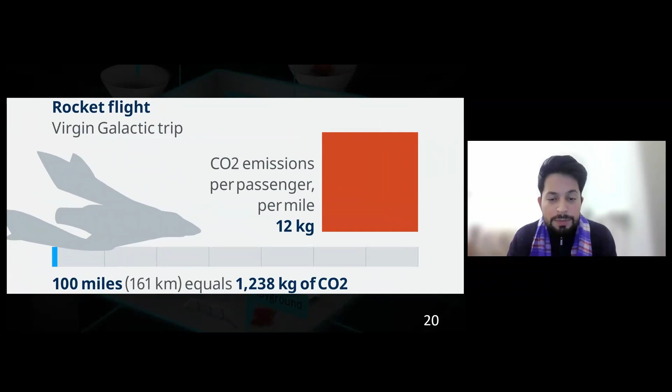So let's look at the first one. If you want to travel 100 miles in a rocket, it will produce more than 1,000 kilograms of CO2. For the same amount of CO2, you can travel close to 7,000 miles in a conventional business class aircraft. So if we compare both, rockets definitely produce more CO2 than conventional aircraft. And this is not good if we think about the long term about our planet and that we want to reduce emissions, CO2 emissions.

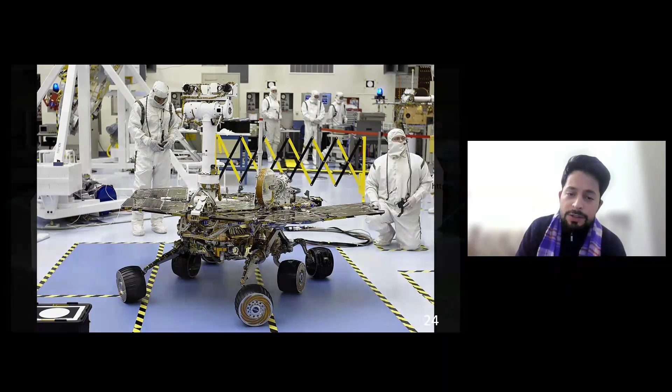The last challenge is that we don't have a full grasp of unknown environments. This is a Mars rover developed in the middle of the 2000s. It was manufactured, produced, and designed by engineers and scientists here on Earth. Scientists made a lot of assumptions about the surface of Mars, and they designed this robot with those assumptions. But as soon as they sent this robot to Mars, after a period of time, the robot got stuck in sand and was not able to move.

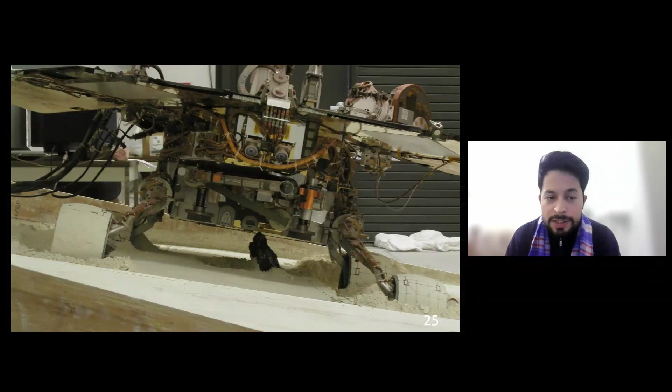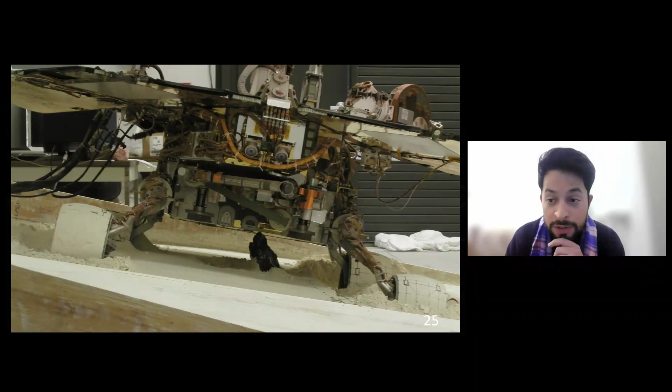So we have three challenges. What can we do about it? Well...

Something we can do: in traditional space exploration, if we want to create a settlement on a different planet, we send an aircraft to, let's say, Mars with people and equipment. These people and equipment start creating facilities for the people. But at some point we need to send that aircraft back because we need to restock provisions, and maybe the people need to rest. This process repeats multiple times until we're happy with the settlement on the different planet. But every time we send this rocket back and forth, we produce CO2, it's expensive, and it's going to take a long time.

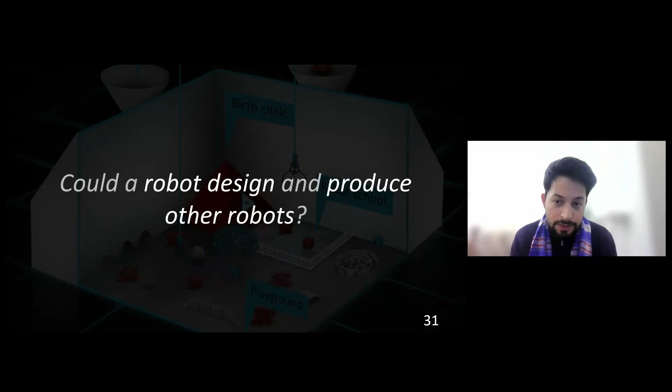A question that we had in this project is: could a robot design and produce other robots? Hopefully by the end of this presentation, we're going to have an answer.

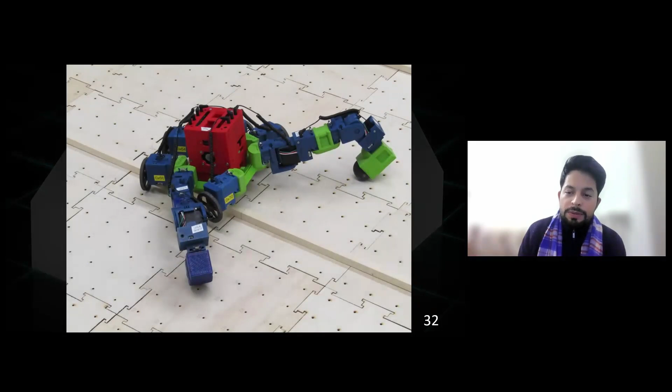The robot I'm going to use as an example for this presentation is this one. Its official name is 56, but for this presentation it's going to be referred to as Bob. We're going to see how Bob was created from the very beginning, how it was autonomously fabricated, and how it's able to perform its mission.

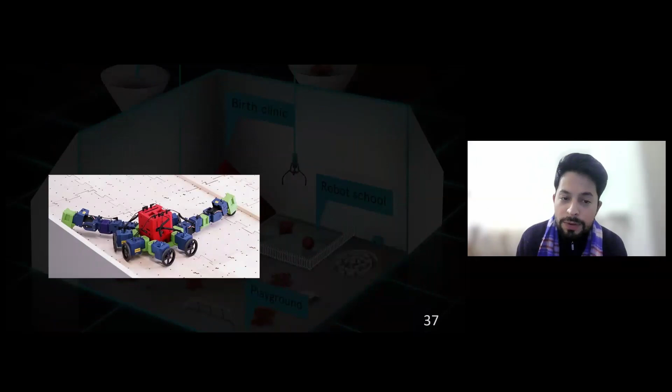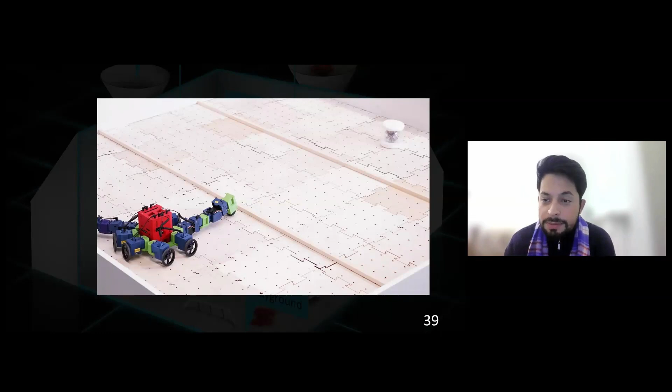But what is the mission that Bob needs to do? Basically, Bob needs to move from one end of an environment and reach a beacon on the other side. But the problem with this environment, what makes it challenging, is there are two sets of ridges in the middle, so a robot with wheels is not able to reach the beacon. It needs more than wheels to reach the beacon—it needs some sort of legs to do it.

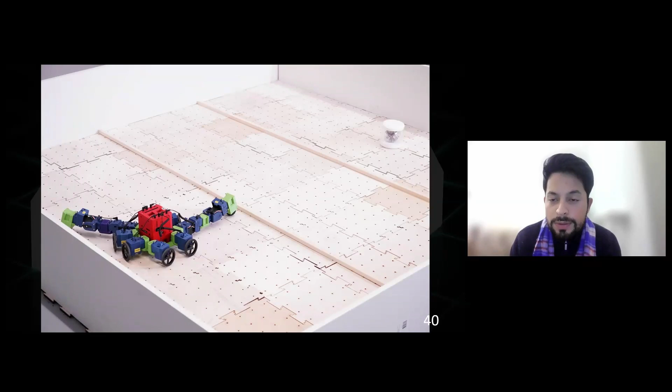We evaluate this robot according to how close it gets to the beacon. This robot went through a process where it was first simulated, then autonomously fabricated, and then we have the final product. I'm going to go through each stage in more detail.

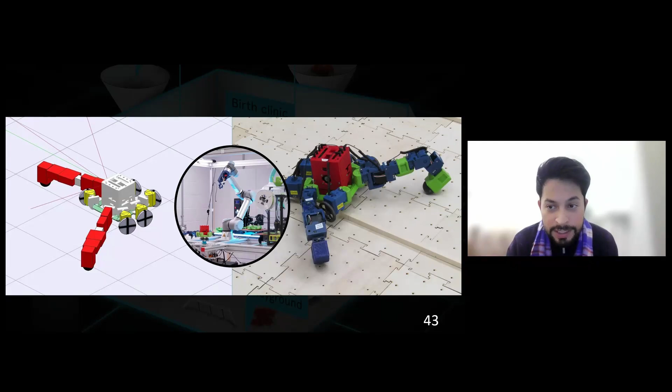In the first stage, the robot is simulated in a computer because there are many advantages to this. It's very quick to simulate a robot, it's very cheap because we don't have to manufacture it, and it's fast to do.

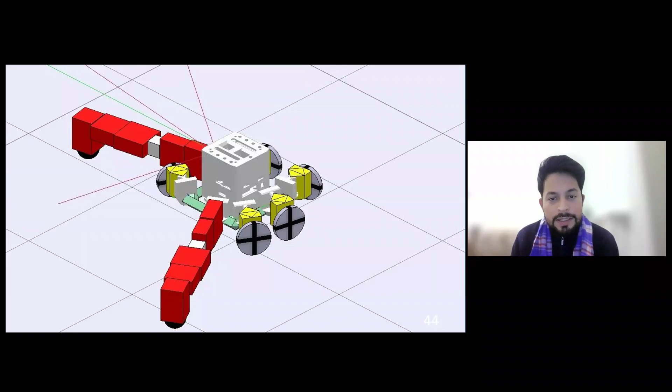In order to design this robot, we use an AI that takes inspiration from nature, not from this specific nature, but from natural selection. I'm going to give you a bit of explanation on how the AI designed these robots and how it takes inspiration from natural selection.

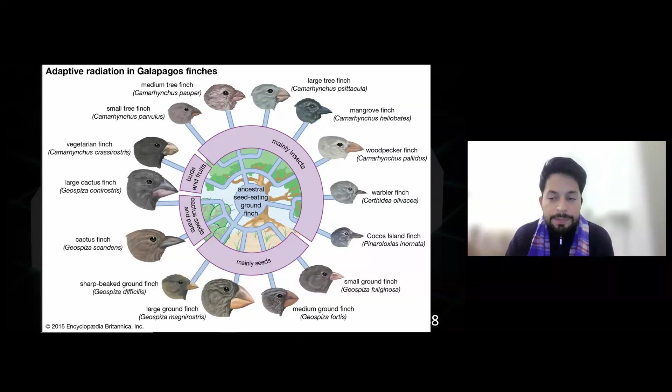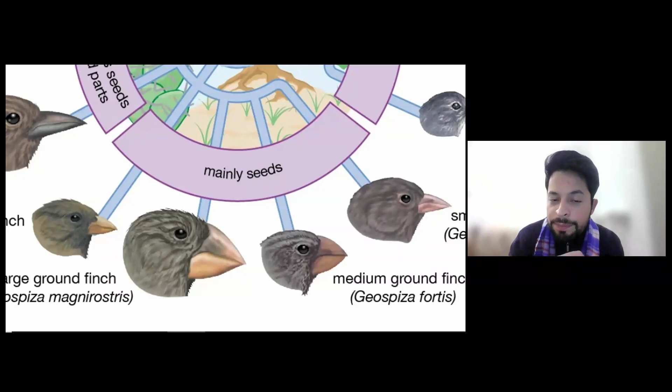In the 1800s, Charles Darwin went to the Galapagos Islands and found something amazing. He found that a group of birds of the same family and species had big, chunky beaks, and these birds used these chunky beaks to eat seeds, breaking through the shell to eat what's inside.

But he found there was another group of birds with smaller beaks, which they used to go through the gaps of trees to get insects hidden inside. So basically, each bird adapted to their own environment—in this case, to the food they needed to eat. If they wanted to eat seeds, they needed bigger beaks; if they wanted to eat bugs, they needed smaller beaks. Natural selection found a way for these birds to survive.

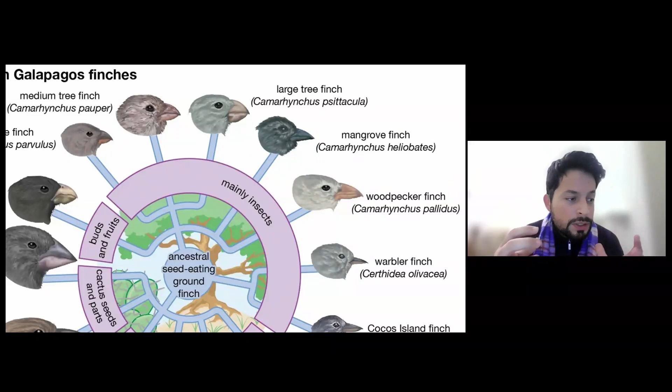So we want something similar in robotics. We want the robots to survive their environments so they can adapt and perform well.

The best robot got a 10, the second best got a 9, and so forth, and the worst one got a 1.

We repeat this process again: we evaluate the 10 robots and score them by how close they got to the beacon, ranking them—you did very well, you get a 10; you didn't do so good, you got a 1. We select the 2 best ones, combine their genes, and generate a new population. Slowly over time, we produce better and better robots this way. This is what the AI is doing, in a nutshell.

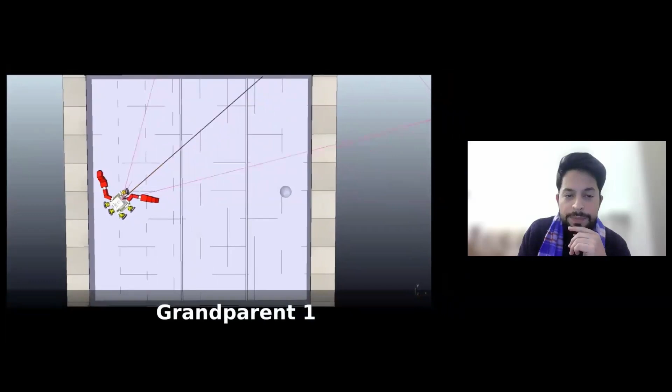Now I'm going to show you how it looks in simulation. The first layer here is the grandparents, and you can see they weren't very efficient at reaching the beacon on the right-hand side. But slowly over time, as the parents and children are born, they come with new characteristics that make them better at solving the environment.

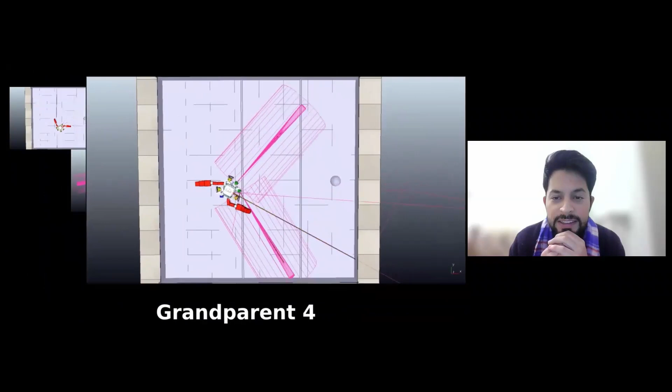For example, you start to see these 2 parents have similar characteristics to Bob, and Bob is a child, by the way—Bob, if you remember the robot from early on in this presentation. Now Bob has the body that can solve this task, but maybe it doesn't have the brain to solve it, so we need to do something about that.

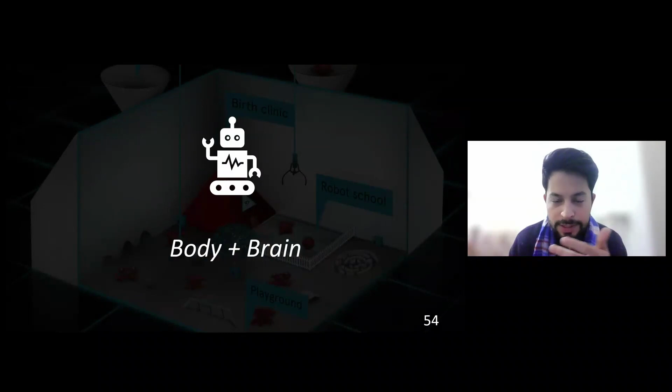A robot, like I was saying, is a body and a brain. We have the body, but what about the brain? The robot needs to learn to do this task, and now Bob needs to go through a learning process where it learns to perform this task.

So we have the body, we have the brain in simulation. Now what we need to do is translate it. Here's a video in more detail showing the process of the robot reaching the target.

And here we go. So yes, we have the robot in simulation. The next step that we need to do is to...

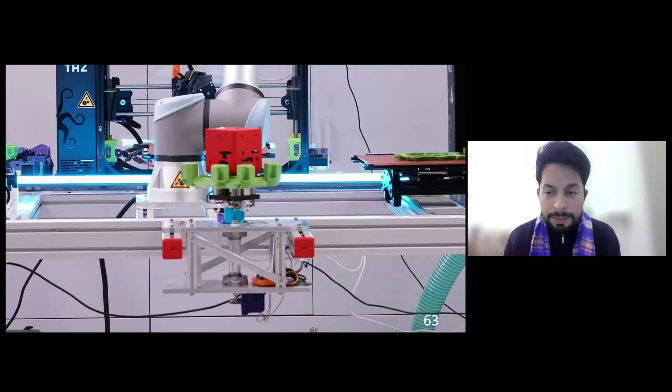Here in the middle is something we call the assembly fixture. What it does is hold the robot tight. There are 4 electromagnets that hold the robot, and this rotates, so it grants access to the robot arm from different directions, so it can attach the different components.

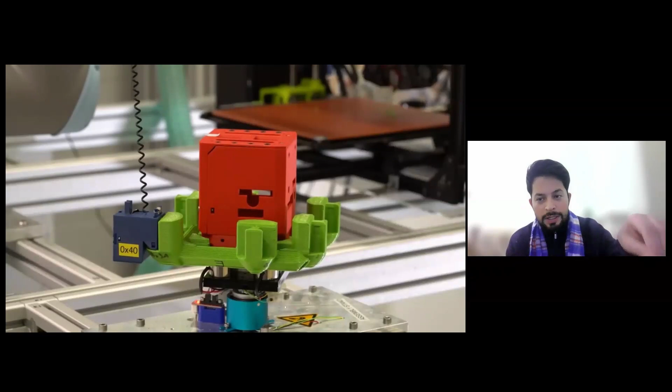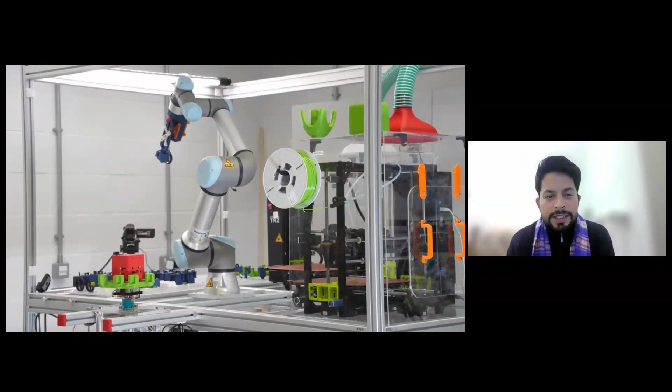Now I'm gonna show you a video of an assembly. This is, I believe, 8 times speed. So what the robot does first is grab that sensor and connect it to the skeleton, then it grabs that cable, which is a spring cable, and connects it to what we call the head of the robot. In the head, there is a computer, in this case a Raspberry Pi, and the process repeats for every single component.

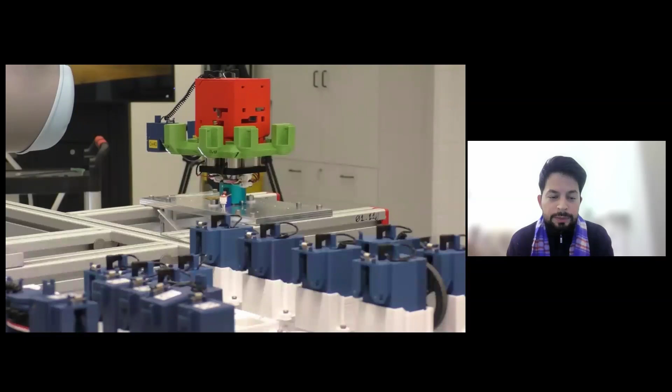The entire assembly process takes roughly 7 minutes. The 3D print part is the longest one, taking roughly 3 or 4 hours. That's why we have 2 3D printers, so we can parallelize the process and make it more efficient. This is something we'd like to optimize in the future, how we can reduce the printing time, because it's quite long compared to the assembly process, which takes 7 minutes.

The reason we use retractable cables is because they get out of the way of the robot. In the past we were using long cables, and sometimes when the robot moved, they got in the way. And there we have it, that's how we autonomously fabricate robots.

So we are going through the last stage of the process. Now that we have autonomously fabricated a robot and have our physical robot, not in simulation, what we need to do next is evaluate this robot. We replicate the same environment in simulation and in reality, just to see if it's gonna work. We put exactly the same brain in the same body, same environment, and the expectation is that it's gonna work. My question is, do you think it's gonna work? Let's find out.

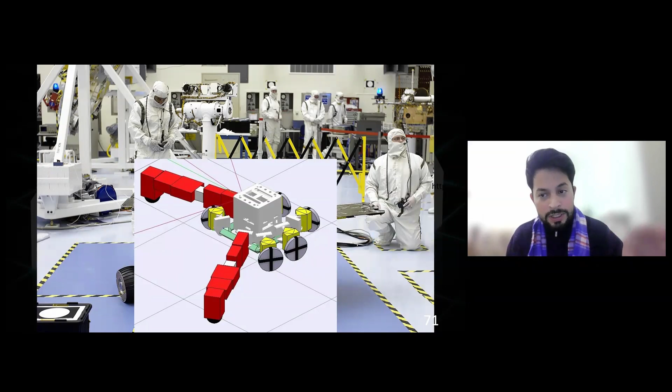What can we do about it? So we have this problem that the robot is not doing the same thing as the physical robot as the simulation one. Well, we can make more accurate simulations.

But the problem with this is that there are two issues: it becomes more expensive and the simulations become slower, because you have to simulate, for example, the contact of the robot with the ground, and that's very computationally expensive. The main reason we were using simulations in the first place is because it's very fast. If we make it slower, it becomes more difficult to evaluate many robots, because we were talking about 10 or more robots at a time, so we want to do it quickly.

So this is not the best approach. What about we drop the idea of simulation and we do everything with a physical robot in hardware? In this way, we remove the reality gap altogether. But we come across a new problem.

The new problem is that we need to fabricate every single one of these robots, and this becomes very expensive and time consuming. This is because we need to 3D print every single robot and autonomously fabricate every single one. The evaluation of one robot in simulation takes, let's say, 1 second, whereas in hardware it takes 1 minute. But if we need the robot to learn, we need to do that 100 times, and that's 100 minutes. If you accumulate all this time, it's going to affect evolution at some point.

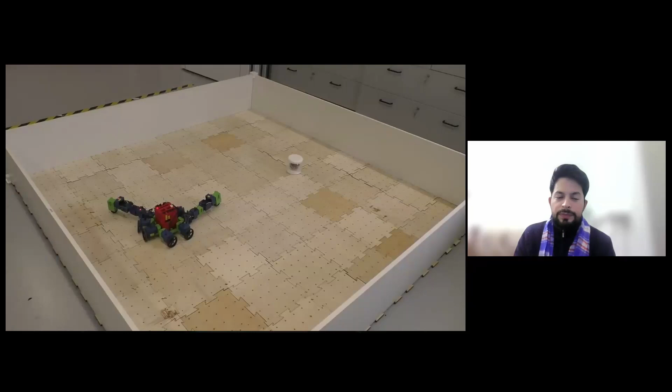And slowly, over time, the robot becomes better and better, until the robot is able to reach the target. This is one of the best behaviors of the robot, and now it's doing the similar thing as the one in simulation.

And there we have it. I went through the process of describing how Bob was created in simulation, how it was autonomously fabricated, and how now it performs well, relatively well, in hardware. But this is not the end. This is just the beginning.

Because Bob is a good robot, but it could become better. For example, it has too many wheels and it has two legs. So what we do is take the performance of Bob and send it back to the simulation, and we refine it. We evolve more robots like Bob. Once we are happy with what we have in simulation, we take the best robot in simulation and autonomously fabricate it, and we have this robot called Tim, which is a child of Bob.

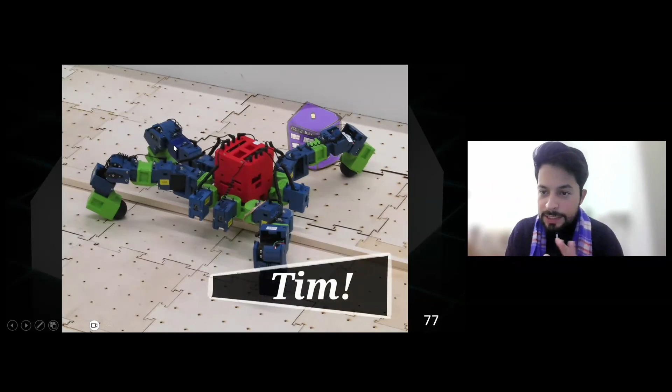And slowly, over time, we are creating better and better robots that work for this specific environment. We haven't gone through many iterations. This is where we stop, but we are aiming to produce more generations of physical robots.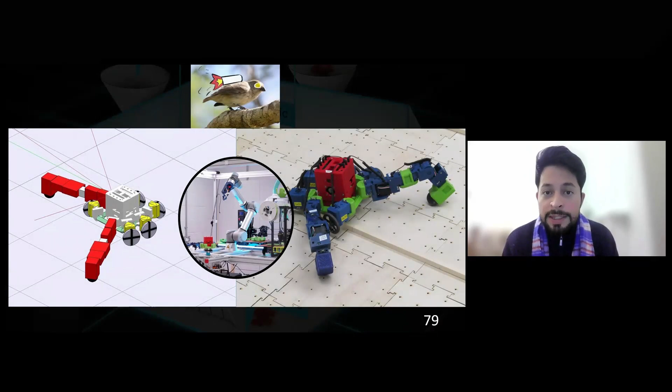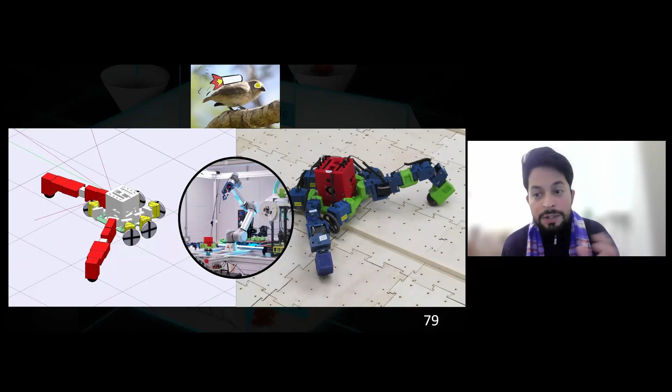So we are coming to the end of this presentation. Just to remind you of what I went through: we use an AI that takes inspiration from natural selection to design the body and the brain of the robots. We do this first in simulation, and then the robots get autonomous. Once we are happy with the design, the robots get autonomously fabricated, and then we evaluate them in hardware because they are going to have different performance due to the reality gap. Then the robot needs to learn this new environment, how to operate in it.

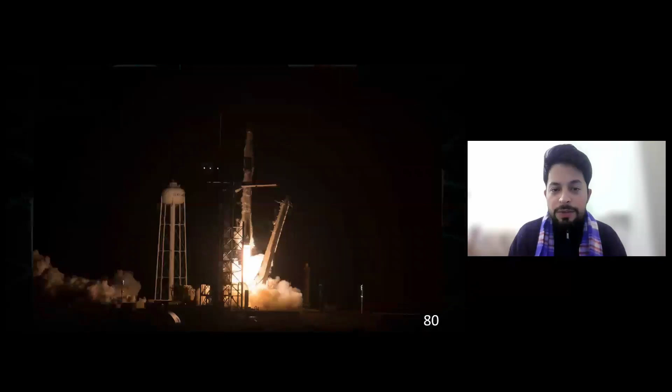And what's the point of everything? Because at some point we want to have a similar facility on a different planet that can operate, and that we can create robots that are adjusted for those types of environments.

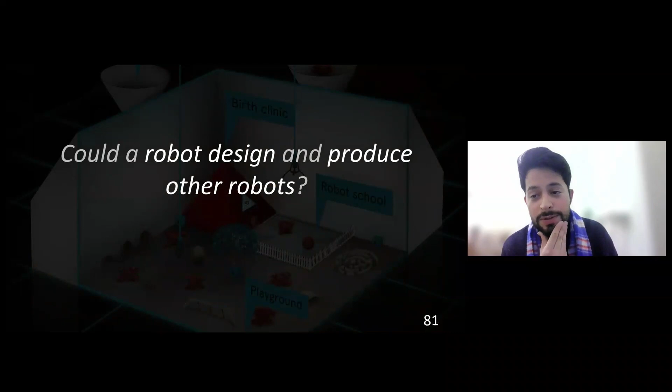And yeah, to conclude, could a robot design and produce other robots? Yes, maybe. We are getting very close, and that's the point.